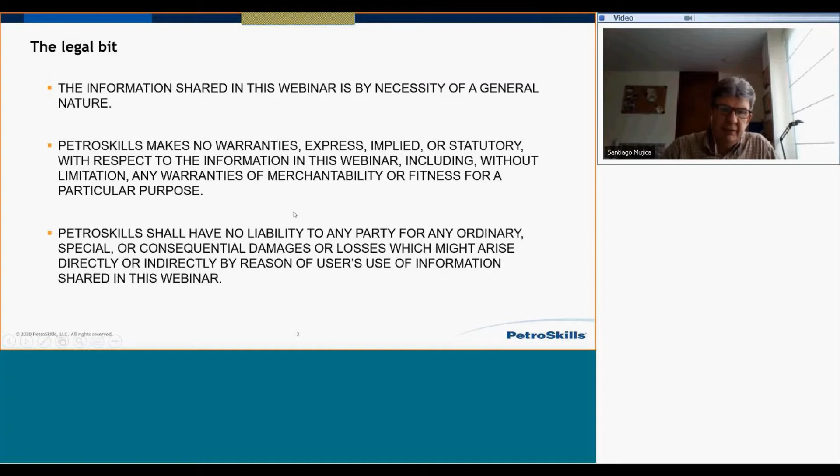Okay, the agenda. Let's talk about well integrity. We are going to talk about the industry documents that we have available to be in compliance with well integrity. Then we'll go to why the well integrity management process is required. That is the main subject here today. Then we'll talk about the possible causes of well integrity issues. We speak a little bit about well barriers, and then we go to some risks during well construction and the consequences.

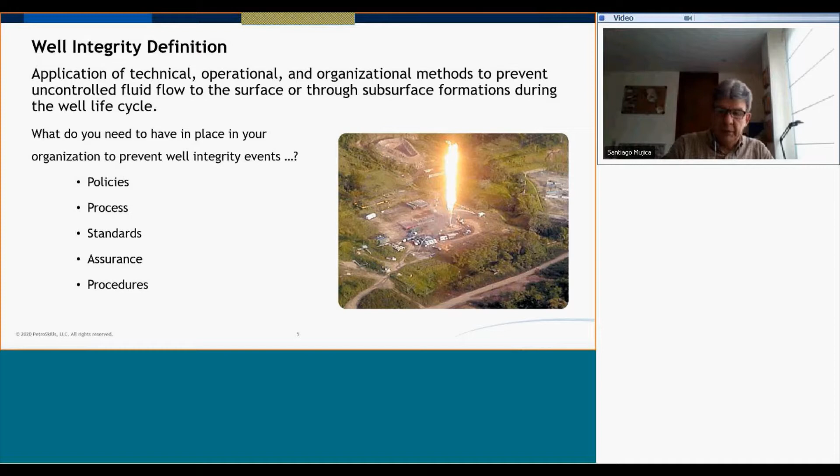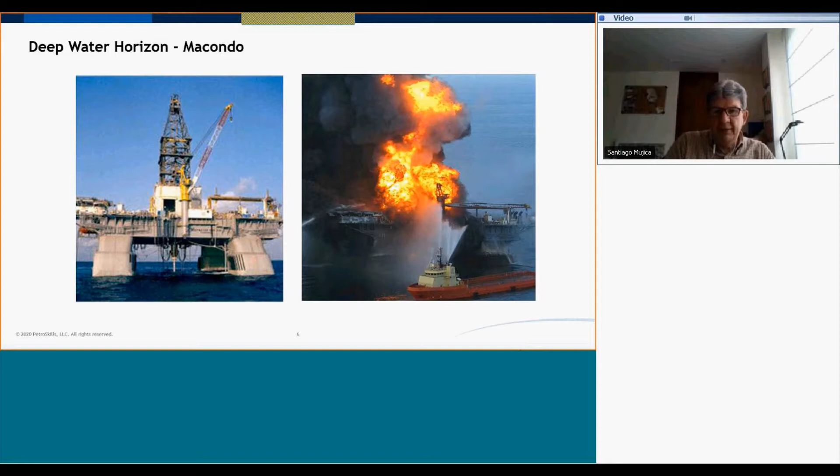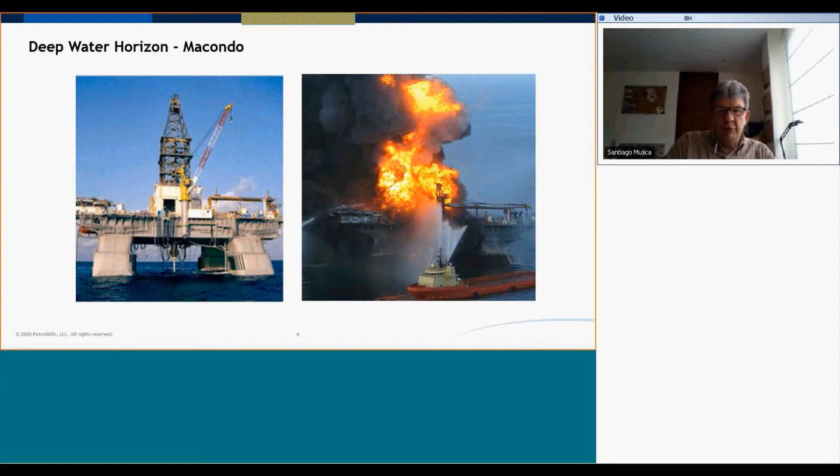This is Deepwater Macondo. This was the Deepwater Horizon, the rig in the Gulf of Mexico in 2010, the semi-sub rig that was used to drill the Macondo well. We had a well integrity issue in the completion phase at the end of construction. Because of that issue, we had an explosion. The well was out of control. Then we were trying to protect people. People were injured, people were killed, and then we had a big oil spill.

So this is the most drastic event that we have experienced in the industry, but we could have similar problems. So what I would like to introduce to you is how we can manage this, how we can prevent this.

So in the industry, we have many documents for compliance. The most important one that we normally have as an operator is the well integrity management system. That document is the one we use to prevent issues and to maintain the wells for the well life cycle. In that document, you need to include the organizational structure, risk, barrier criteria, barrier verification, management of change process, reports, standards, and continuous improvement process, and when you need to do audits of the system. So well integrity management is a key document that I recommend all companies have in place.

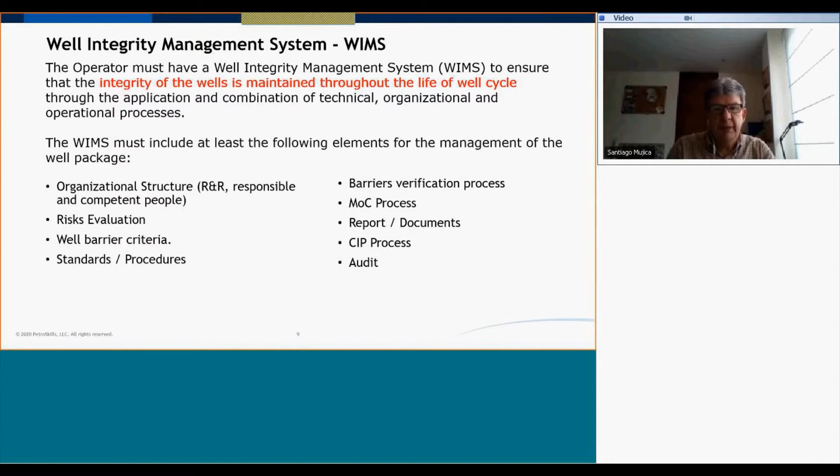Okay, the most important document as a company is to have a policy. The well integrity policy covers from the top down all the issues regarding HSE, operations, and the management of well integrity. Under this document you have the well integrity management system.

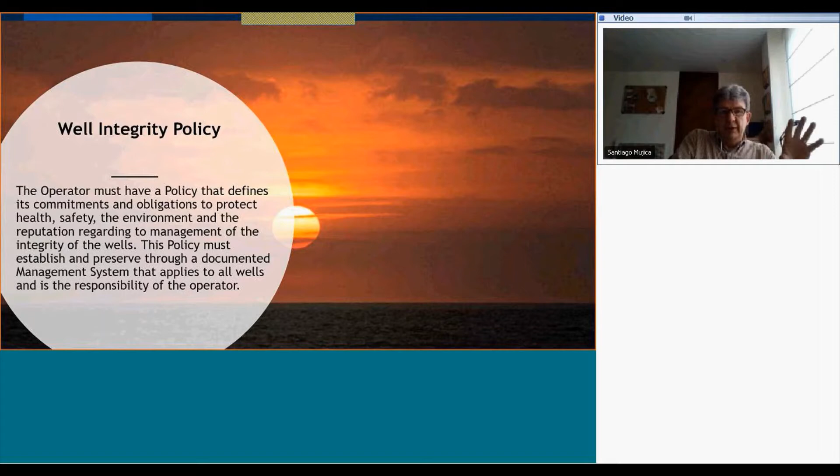Also, you have a lot of information from the industry that they have developed. We have a lot of normatives. One of the most important ones is the petroleum and natural gas industry ISO 16530, and NORSOK. And we have plenty of documents covering different things like annular pressure management, deepwater design, construction analysis, and downhole safety valves. So we have a lot of normative documents as a reference to prepare my well integrity policy and my well integrity management system, and also to keep that as part of the company policy. Okay.

Okay. Now, why is the well integrity management process required or important? So, based on the ISO 16530-1, these are the phases that they consider that we need as a company to have. So, from the basis of design phase, then the design phase, the construction phase, that is the drilling side, then we hand over this to operational people. We do some interventions and then have the P&A.

Okay, this process is very solid. I like this process because it includes all the areas that we need to have in well integrity, in the well life cycle. Also, we have here the lessons learned. So we always learn from the operations, learn from the intervention, and from the process itself, okay? So we need to feed back all these and learn and apply for the next well.

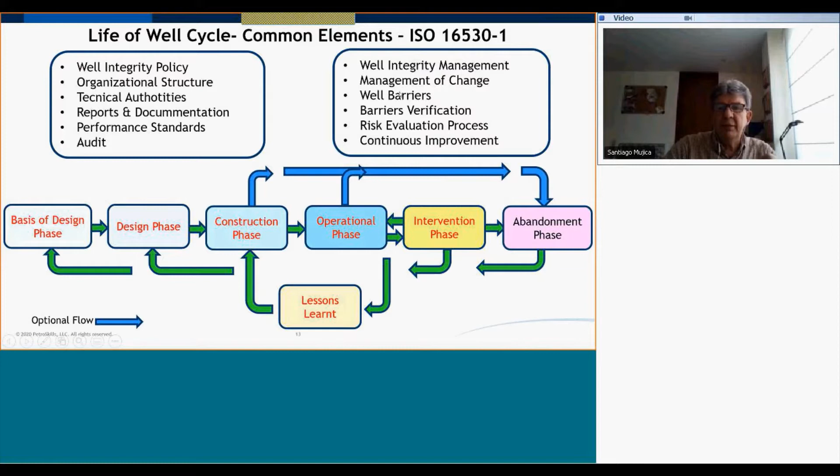I'm going to talk about basis from that process, from the ISO. I'm going to take the basis of design, but for the input requirements. So why? These basis of design documents, I consider this one of the most important documents because every time we develop a field, we need to have very clear what are the well objectives, what kind of data we need to have, what considerations we need to have through the well life cycle, okay?

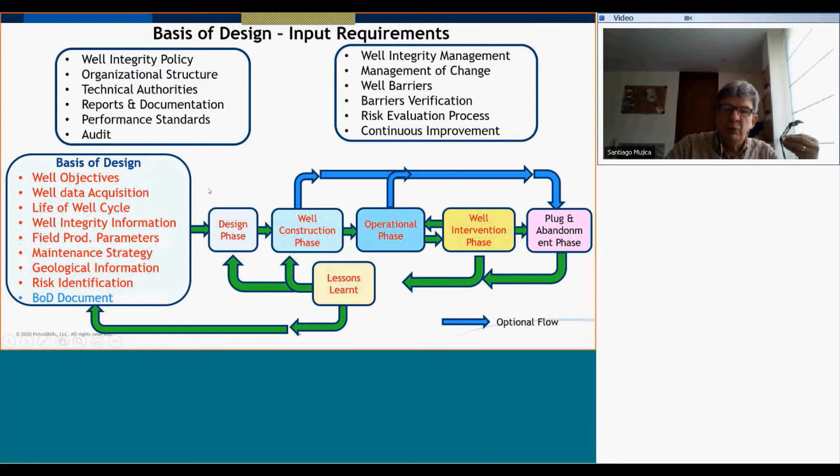What kind of fluid parameters do we need to consider? What kind of interventions are we going to do? What is the strategy for management, for maintenance, for testing the wells, for testing the Christmas trees, and so on? So this basis of design document is quite important to have. And we use that for every well design and so on, okay?

Based on that, how do I build the basis of design document and my integrity management system? So we need to start from scratch. Let's say we have a field, but we are going to do an exploration well. So from the exploration well, we obtain some data at the beginning, right? From the exploration wells and the appraisal wells, we have data.

We collect information from the fluid, from the rock, okay? And we analyze the productivity, the GOR, and things like that at that moment. We collect some information like PVT data. We simulate the well behaviors, the reservoir field behavior, and then the reservoir guys build the production forecast for that field, right? So from the PVT and some simulation studies, we can start building a field development plan where maybe we'll have some information from the water, maybe not. And at the beginning, we consider those kinds of factors, okay?

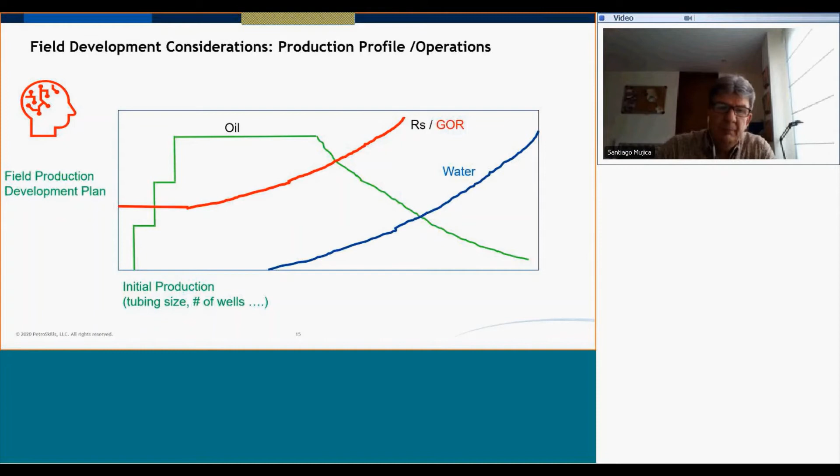From that, once we build that, we have the initial production, we define the tubing size, the number, we say we are going to drill, let's say 30 wells, 40 wells, and so on, okay? Does that field need artificial lift or not? What is the development plan to build and maintain the plateau?

Then we say, okay, we are going to perforate the zones, and we are going to do, let's say, coiled tubing interventions, or we are going to perforate the zones, the reservoir, by doing E-line, slickline, and maybe we can plan in advance from the beginning what kind of workovers we are going to need. So we need to plan that in advance just to see what size of tubing, what kind of damage to the tubing we'll have because of, let's say, coiled tubing runs, E-line runs, or whatever, okay?

Once we have the water composition also, if we are lucky, we get from the appraisal well the water characteristics, and the fluid characteristics we already have, we can simulate what kind of corrosion, erosion problems we will have, if we have sand production or not. So all those considerations are quite important for the completion, for the casing sizes and completion sizes. That's very important. At the end, once we plan the completion, we normally consider the most important part: how we are going to spend on P&A.

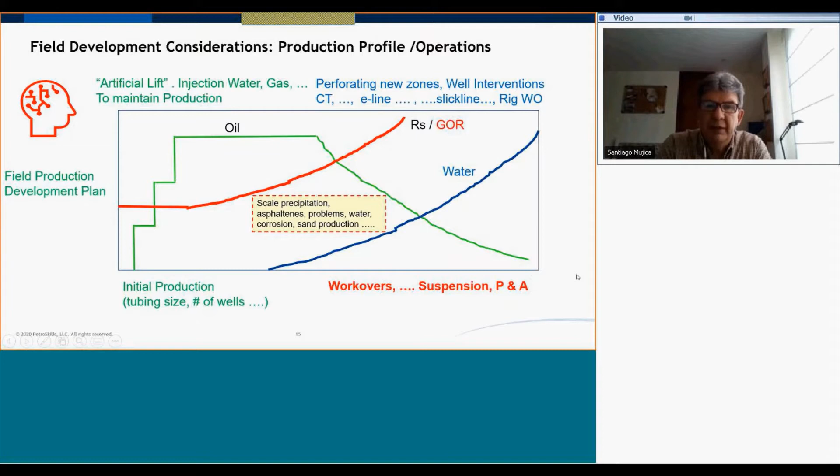So all that information from the beginning, that's what I talk about the BOD. BOD is accompanied by this kind of planning, and those are the things that we need to know. Okay, very important phase, this one.

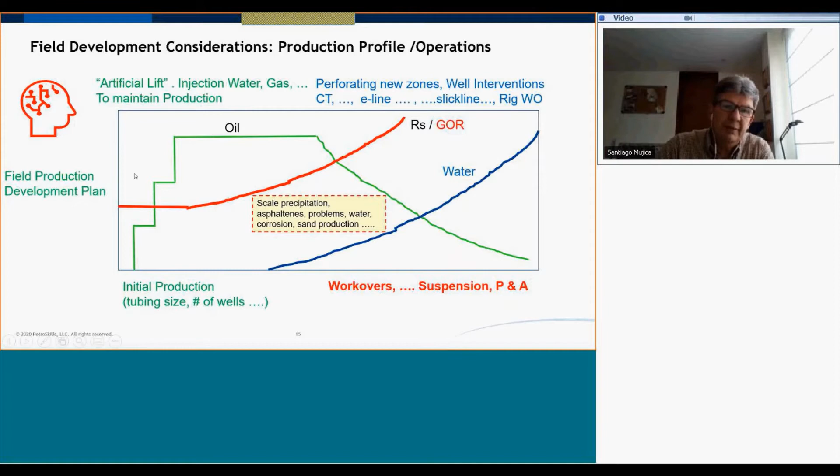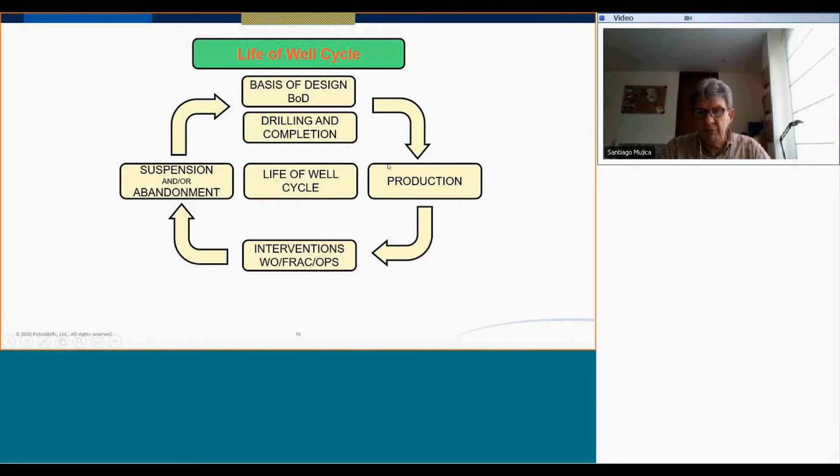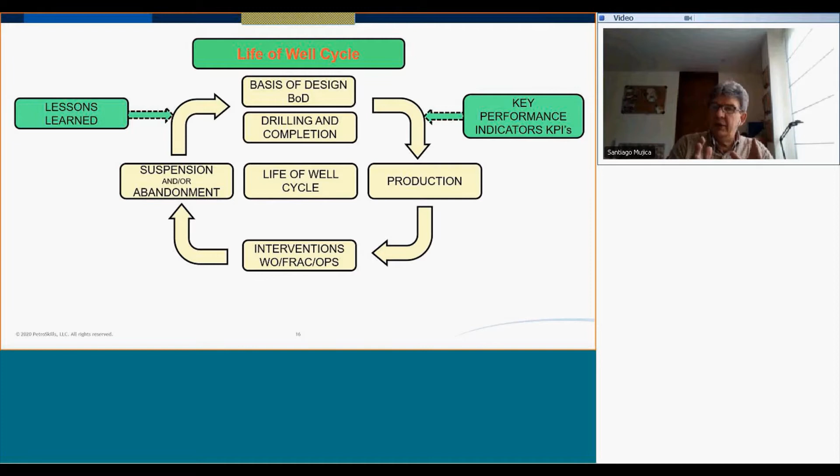Okay, this is the summary of the life of well cycle. The main point here is, once you define the basis of design, drilling and completion, production, intervention, suspension, we need to have, as I said, some lesson learned collection every time we drill a well, and some key performance indicators to know how we are doing.

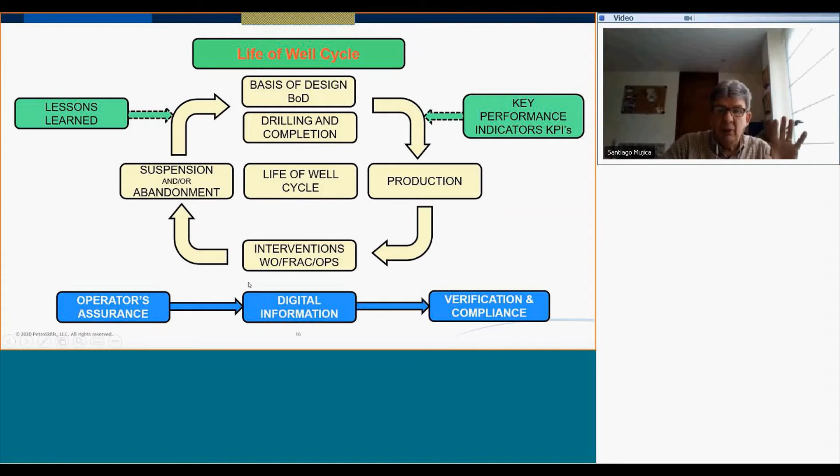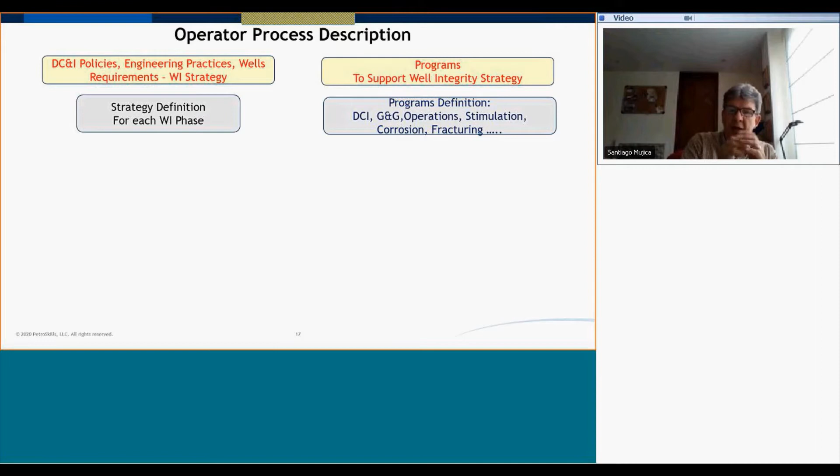So we need to consider that as part of a special program for stimulation or fracturing, what kind of corrosion we have or could have, okay? And we need to define a strategy for these kind of things for the different phases. So we have to work this from bottom to top. So once we have all the clarity on the programs, we can see how we are going to do the operations, okay?

Very important, as I mentioned, we always need risk in the drilling phase or completion phase or the intervention phase. So it's always important to have a risk matrix in which we define what kind of risk we will have. For example, in drilling, we have high deviation wells, horizontal wells, so we need to consider the risks. Because of that, we need to define exactly what problems we are going to have in the well, okay? All those things are supported by the methodology that normally you have.

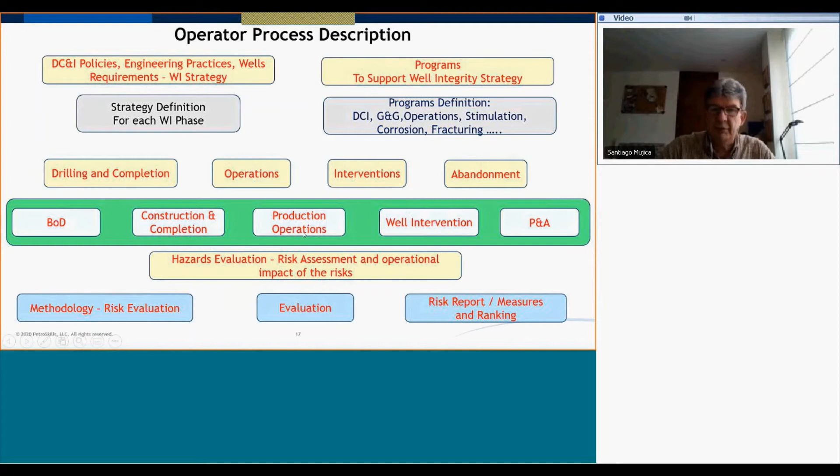Every company has a methodology for risk evaluation, and we will talk about that later. And then we need to keep a risk report and ranking of all the problems that we have. My recommendation for you guys, because normally a company has a drilling and completion department, then the operations or production people, interventions, and this is the phase that is normally included here. But I will always include this area that some people have to be focused on within the basis of design to update the conditions of the well, okay?

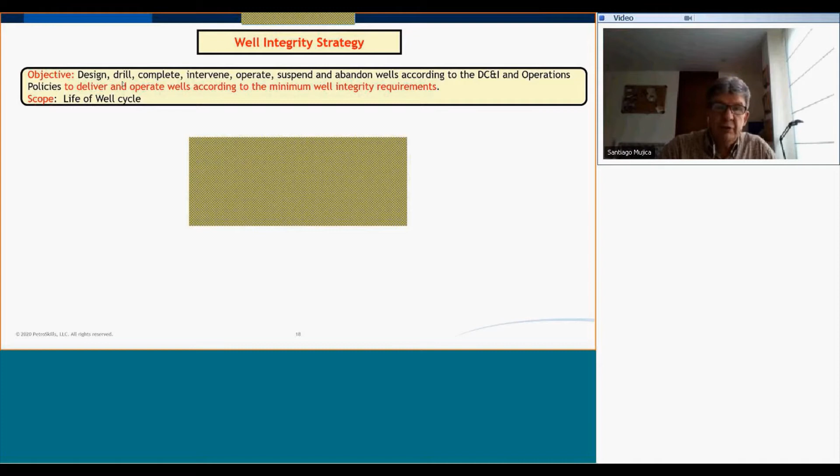As a company, you need to have a well integrity strategy. What is the integrity strategy? The integrity strategy is all those programs and procedures that we need to consider to deliver wells according to the minimum integrity requirements. Or in other words, we will always try to have the well with a very good integrity. Sometimes you could have some issues, but then we need to manage those, okay?

So now, I include field manager, but you can have here the drilling and completions manager. Depending on the company, you have some people that are responsible and accountable for this specific issue, well integrity. Then you need to define technical authorities in different areas. For example, a technical authority for casing design, a technical authority for completions, a technical authority for interventions. That's the ideal. Just to have people who really know and have experience in those areas, okay?

And that strategy should be supported by the minimum requirements, as I mentioned, lessons learned. You need to have a very strong management of change process, because sometimes we change process and we have problems. If we don't collect this properly and we don't evaluate properly when we are making changes in drilling a well, let's say, we could have some bigger problems than we have at that moment, okay?

I include here the well dispensation documents. I put it in red because normally those dispensations have been the most critical documents that you can prepare, because a dispensation is to postpone, let's say, some integrity fix. We are going to bypass some part of the facilities.

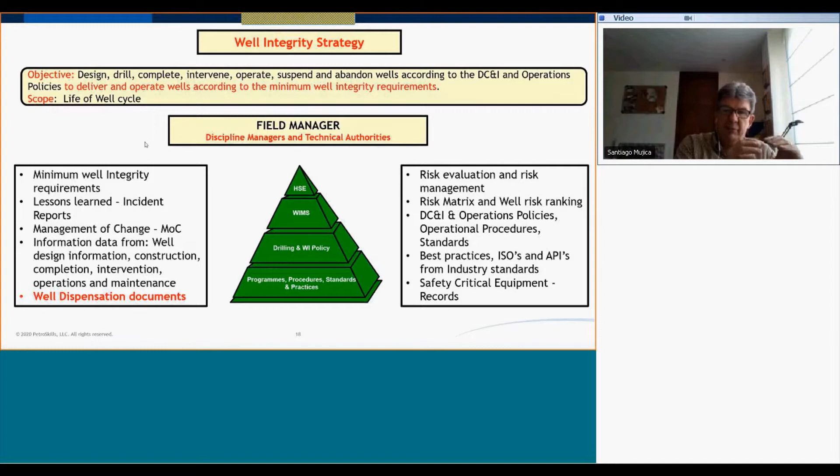Those documents are prepared specific for that field. If you have another field, you need to create new ones, because you can have some changes, okay? So you cannot standardize to different fields all the time. Or include criteria: for this field A, I have this procedure. For this field B, I have the other one, okay? So that's pretty important.

One of the things that normally we need to have is very good clarity on the roles and responsibilities. When we talk about technical authorities, also we talk about people. Always people are managing the wells. Always people are taking the decisions. So I put here some different activities and different positions. So let's talk about a few.

So the well integrity engineer is responsible for all the issues related to well integrity. In cementing design and operations, that person needs to have at least an intermediate level. In the evaluation of the multifinger caliper logs and USIT logs, she should be an expert. So we need to define what kind of expertise each person should have and what kind of responsibility. The well integrity engineer really needs to have integrated knowledge on many things.

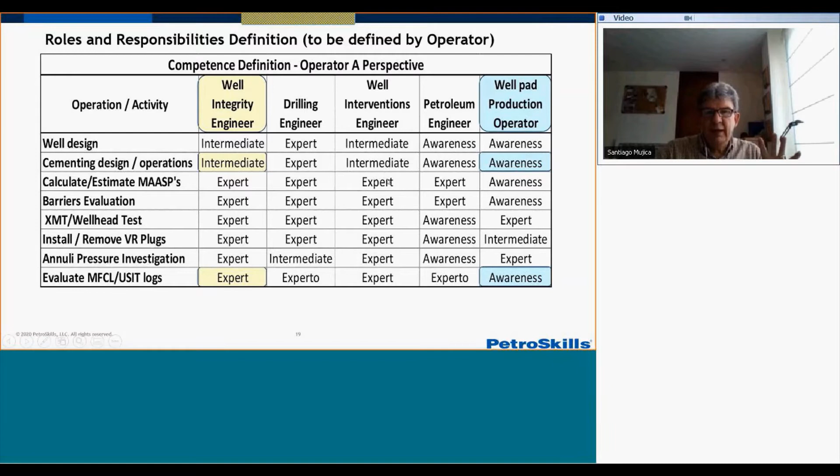But let's talk about a well pad supervisor, well pad production operator. That guy, in cementing operations, maybe just needs awareness about the quality of cement, the liner, the production casing. Okay, but in the annular pressure investigation, he should be an expert, right? And in the well test, Christmas tree and downhole safety valve test, he has to be an expert. So depending on the position, we need to specify what kind of responsibility and role each position should have, okay?

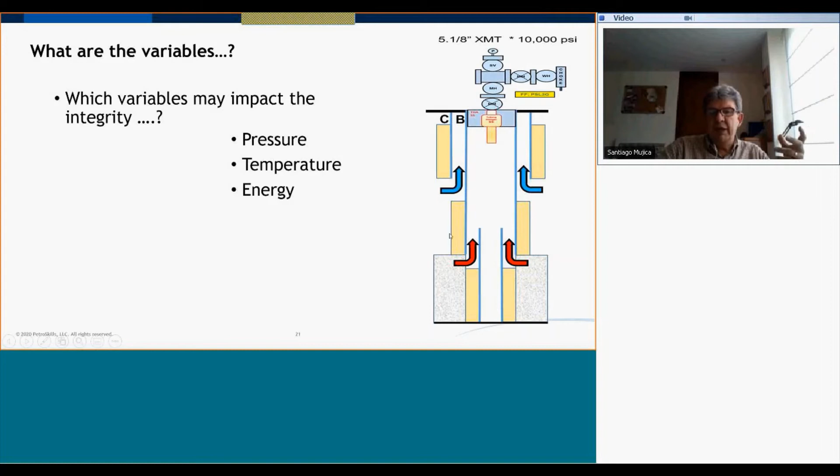Now, let's change the subject a little bit. What are the possible causes of well integrity issues? What are the variables? I have a very simple well here, not with completion equipment yet. We have pressure, temperature, and energy. We always talk about annular pressures. We have temperature profiles. We have annular pressure changes because of temperature changes, okay? And energy, there could be some formations that are overpressured. So we have all those factors.

Normally we talk about these factors, but there are other very important variables in well integrity: people who make the decisions. The decisions are made by us, by people. For example, in a well intervention, the well intervention engineer made the decision. You can have a very good procedure, but who is making the decisions at the rig site? Who pressure tests the equipment? Us.

So who made the decision about the leak, if the pressure test is fine or not? So, people: that's why we talk about roles and responsibilities and competencies. We need people with competence to make decisions on well integrity, okay?

Equipment. When we talk about the equipment, we select equipment based on corrosion, erosion, the pressures that we are going to apply, and the connections and things like that. So we decide what kind of equipment we are going to run. It's not only the pressure and the temperature, sometimes it's the equipment. If the equipment is not designed properly, we make mistakes in the well. We'll see that when we see the problems.

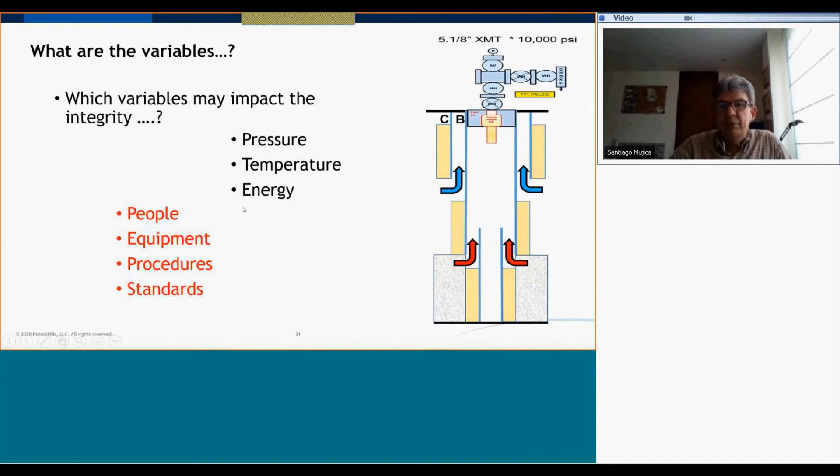Procedures. As I mentioned, if we are doing a cementing operation and I don't follow the procedures, maybe the cementing operation is not good. So how do we ensure we are following the procedures and standards? We can have standardized procedures, standards for our operations. All these are things we need to keep. It's not only related to pressure, temperature, and energy. It's related to people and other stuff.

Okay. We mentioned safety critical equipment. One of the most important things in wells is the critical equipment that we install. We have a wellhead, the casings, production casing, production liner, packers, tubing, downhole safety valve, Christmas trees, and maybe other tools. But what is safety critical equipment? Let's take an example: the production packer.

It is equipment that we need to ensure has all the capability to support the burst pressures and the collapse pressures. The rubber element must be designed for the fluids we are going to work with, or the stimulation fluids we are going to pump into the well. Also the temperatures at which we set that packer, and the stresses and loads we are going to apply onto this production packer.

So there are many factors to consider in the selection of the packer, and that's why we call it safety critical equipment: if the packer fails, we are going to have leaks in the well from the internal to the annulus, and maybe from the annulus to the B. So that's what we define as critical equipment, okay?

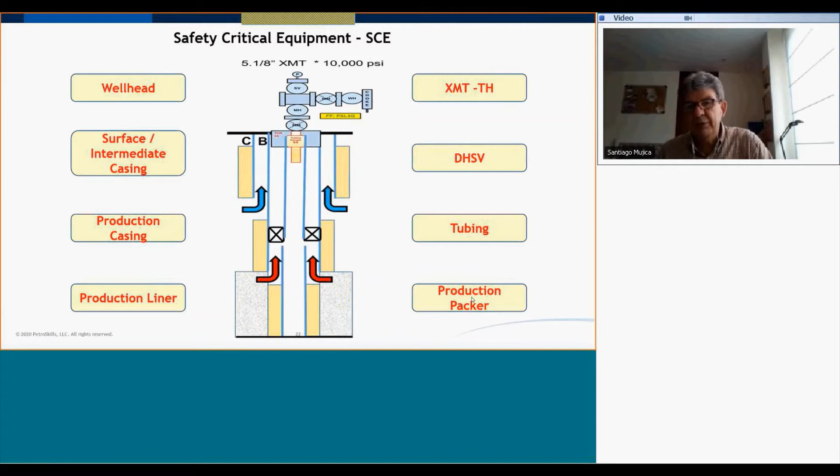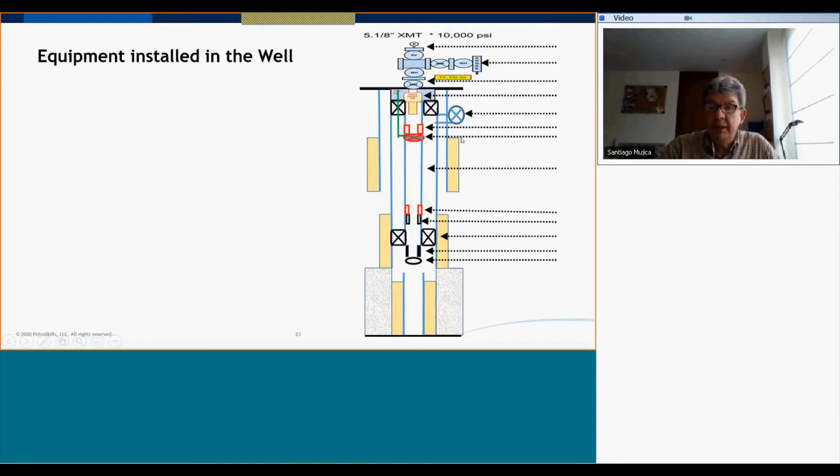Safety critical equipment. Let's say we have this kind of equipment in a well. We have many pieces of equipment in the well, right? The first question, as a completion engineer or operations engineer, is to identify what kind of equipment I'm using, okay? Do we really need that equipment? What is the piece of equipment for?

Let's say this is a sliding sleeve. Do we really need that sliding sleeve? Are we going to operate it? How many times are we going to operate it? When are we going to do it? Sometimes we include tools or pieces of equipment that we don't need. So the less equipment you run, the fewer problems you are going to have in the well, okay?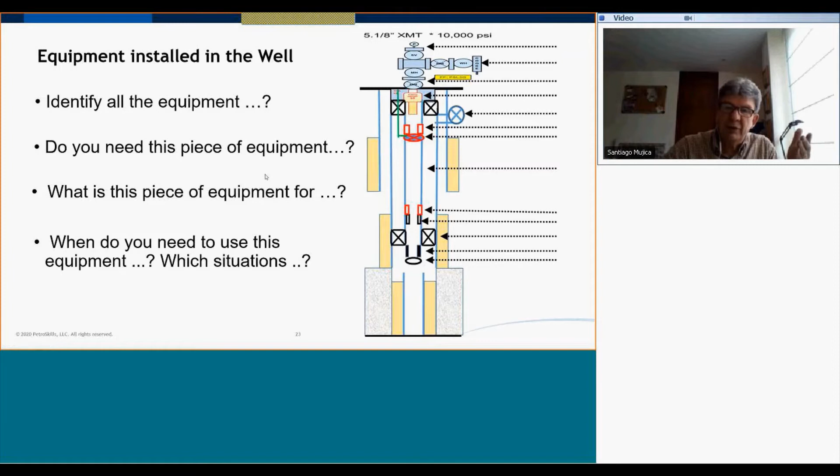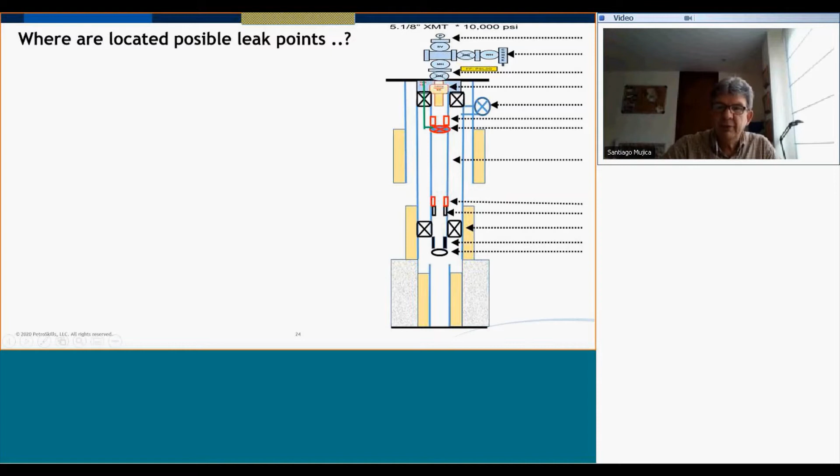Where are the leaks? For the same well, where are the leak points here? All these leak points, right? So look at the points where you can have a leak. Let's say you have a well at 10,000 feet, and each casing joint is 40 feet long. So how many joints do you have? 250. So at every connection we have a possibility of a leak, right?

So we need to ensure the design of the connections of that casing, whether the casing supports the loads, whether this casing is designed for gas or not. Is it a premium connection or not? Do we need a premium connection? How are we going to cement it? What are the possibilities of having a failure in the cement?

Talking about the tubing, did we really design the tubing for the loads we are going to have? Maybe yes, maybe not. So we need to design and simulate that tubing. Do we apply the proper dope on it? I mentioned the circulating sleeve. Is that circulating sleeve the right material?

When we talk about tubing and casing, do you have CO2 or H2S? Do we really have the proper metallurgy for this tubing? If not, we are going to have corrosion. Then very soon, if you have water, you are going to have leaks through the tubing or the casing.

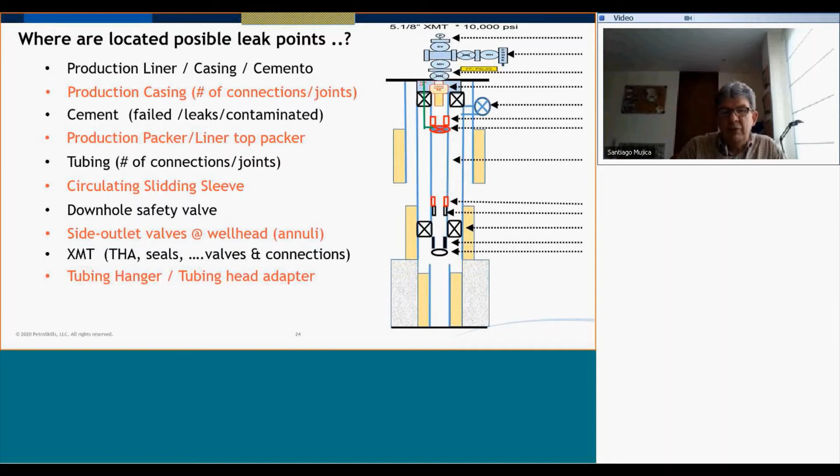The Christmas tree. What about the tubing head adapter? Is the tubing head adapter designed for corrosion? How is the primary seal? Is it metal to metal or is it an elastomer? Do we really need a primary and secondary seal? All those kinds of considerations we need to have in mind always when we are designing wells, okay?

Let's talk about barriers. People talk about barriers. So we have different types of barriers: mechanical barriers, operational barriers, human barriers, administrative barriers. Okay, what is the meaning of barrier? It's a combination of components or practices that contribute to the reliability of the system to prevent and keep control of undesirable fluids to surface or downhole.

So a barrier is something that we run into the well to prevent flow or to maintain the pressure that it is designed for. We have mechanical barriers like plugs, liner top packers or production packers, and we have operational barriers, where there are procedures in place. There are human barriers, because sometimes, as mentioned before, a person will say, no, this is fine, and it's a human barrier. Or you say, no, we have to pressure test properly.

We have administrative barriers. Sometimes what we say to management, they are going to make a decision, so there are administrative barriers in the decision. Sometimes you say, as an engineer, we need two barriers, and some people say, no, one is enough. Let's pressure test to the maximum pressure. No, let's pressure test to 2,000 PSI. So those are human barriers, administrative barriers. So be careful with that. As an engineer, you always have to make calculations.

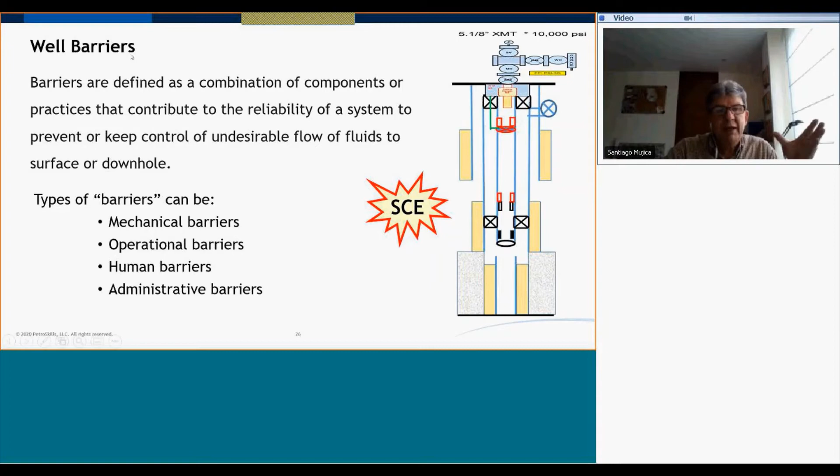On the number of barriers, we always recommend a primary and secondary barrier. Normally you design for a primary, a typical barrier that maintains the source of the pressure. Sometimes the secondary barrier has the same qualification or composition, because if the primary barrier fails, that pressure is going to be applied to the secondary. So depending on your criteria and the needs of the well, the pressures and the fluids, the type of barrier for the primary could be the same as the secondary or very similar, okay?

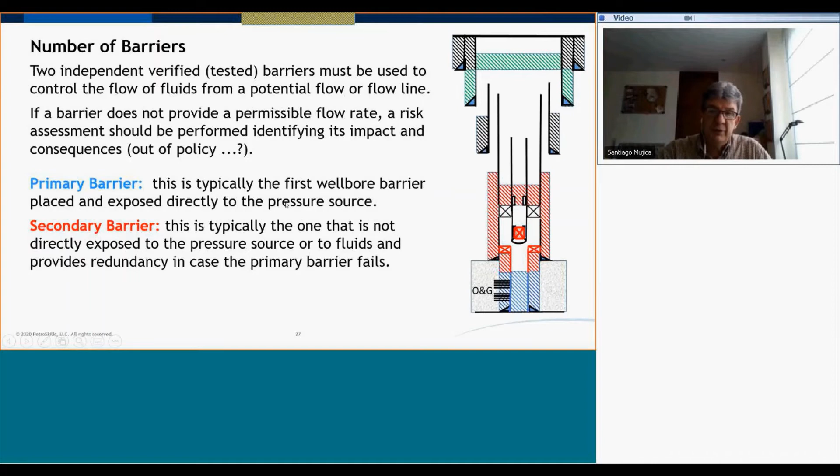So that's a criteria. In this example, the blue one is the primary. This is a P&A, so we pump cement, we isolate all the perforations, we cover above the perforations, and we have very good cement behind this. We also have the secondary barrier: a liner top packer here, a casing, and we set a second plug. So we have primary and secondary barriers to prevent any fluids in the future. When you P&A, you need to ensure you have proper isolation, okay?

Now, how should those barriers be verified? Normally we do functional tests. Those functional tests are done externally, before you run into the well. Let's say a packer has been tested in the shop. Once you pressure test it and verify the packer or the plug is fine, then you do a pressure test verification at the well itself.

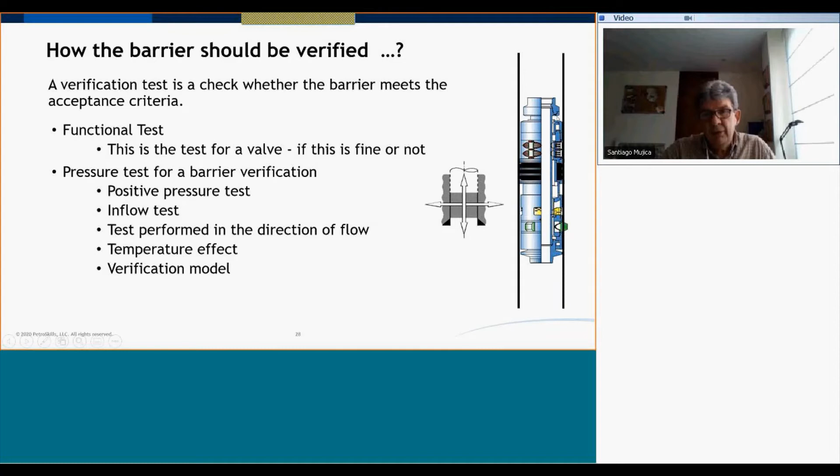Normally the recommendation is to pressure test in both directions. So you can do a positive test and sometimes a drawdown test if possible, okay? And you need to consider all the temperature effects and conditions. But remember, a barrier that you run in the well is safety critical equipment, because if it is for permanent isolation, you need to verify that it is going to work for a long period of time, okay?

And these are the performance criteria for different barriers. So every time, as I mentioned, you have, let's say, a packer or plugs. So you need to know how that packer is going to behave with time through running many times with the wireline operations, or what kind of specification for burst and collapse.

Then you need to perform a connection test, material test, functional test, test duration. All those things depend on the criticality of the equipment in the well, okay? But always you need to have minimum considerations to control that, okay?

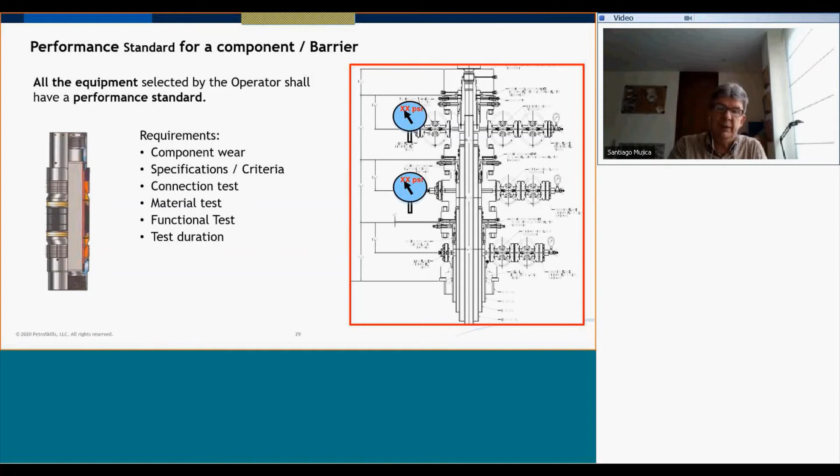A little bit about tubing retrievable safety valves and wireline retrievable safety valves. So depending on the requirements and the well type, you can have wireline retrievable or tubing retrievable. This depends on many variables. For example, every time I run a wireline retrievable safety valve, I need to pull it out, do the operations, and then run back the valve. But every time that this profile or the seals are exposed to operations, you have the risk of damaging those seals.

So that criteria always depends on the operational side, because if you have so many wireline, E-line, coiled tubing operations, there is a high risk of damaging that profile. And the other thing that may push you to make that decision is the size of the production casing. If you don't have enough space to run a tubing retrievable, then you have to run the wireline retrievable, okay?

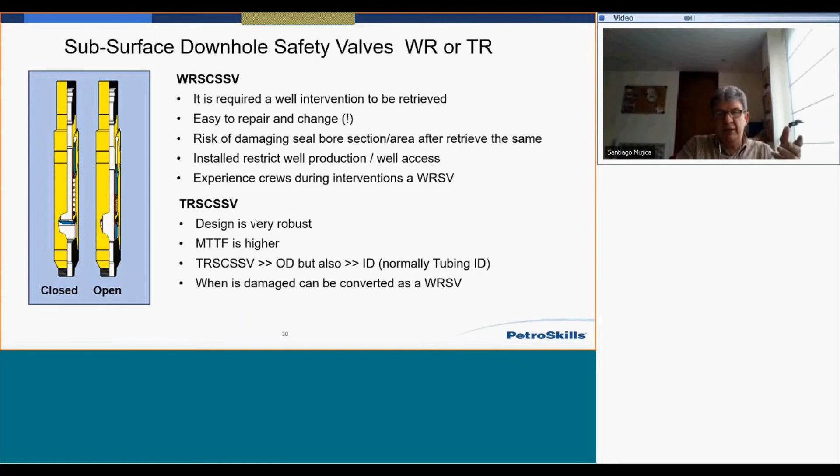But I recommend always the tubing retrievable, because then you have the option. If you damage that valve, you can do troubleshooting and run a wireline retrievable safety valve afterwards, after the damage, okay? These are the API rules, everybody knows them. Everywhere, there is a recommendation to pressure test the downhole safety valve at least twice a year, or every 6 months, okay?

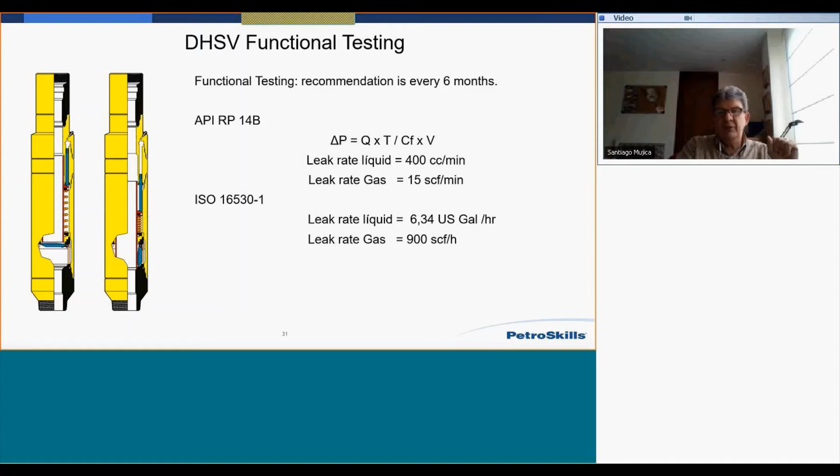Let's talk a little bit about risk. We talked about processes, about some barriers and issues. Now let's talk about some risks during construction. What is one of the most critical barriers in the well? Our cement. Cementing operations are the most important things to have a proper isolation, to prevent leakages, isolate production zones, or abnormal pressures, okay?

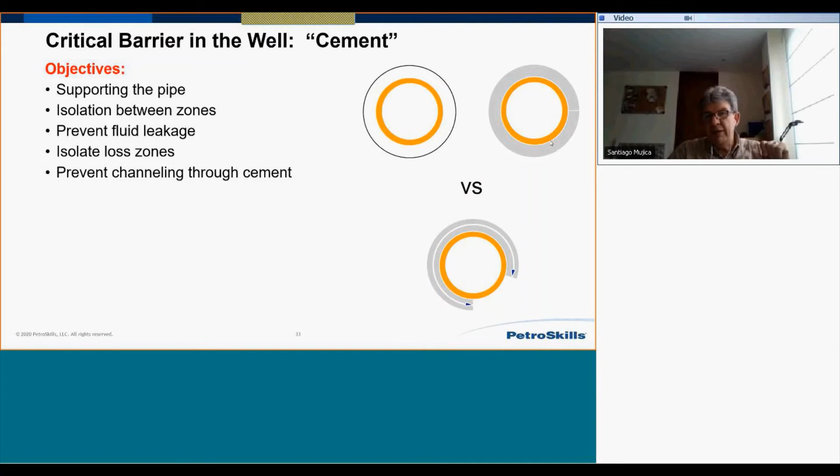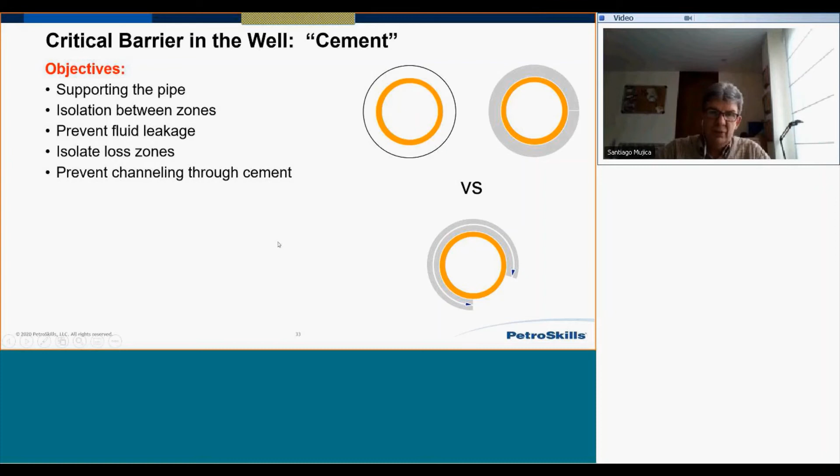So this is a nice cement operation where you have 100% cement. And I have an example of no cement, or maybe partial cement. For me, this is the same. You don't have cement, you don't have isolation. If you don't have good centralization and a good 360-degree isolation in the casing or the liner, you don't have good cement anyway. Some people say this is more or less okay. No. Either you have isolation or you don't.

So this is quite important. 70% of the problems that you have in the wells is because you failed to do something on this. In other words, the planning phase is the key factor to be successful in cementing operations. In the other training course that I have, I speak a lot about job planning, spacer design, and slurry design. But you see, minimum 60 to 70% of this is the planning. The planning phase is the key.

What kind of cement do you have here? As an example, in the previous slide, we have a partial cement. This is the bond index, so you have communication between zones, so you don't have a good cement job. Maybe this is a contaminated cement, and it's on one side of the casing. Also, you didn't centralize properly, and you have this varying through the 360 degrees.

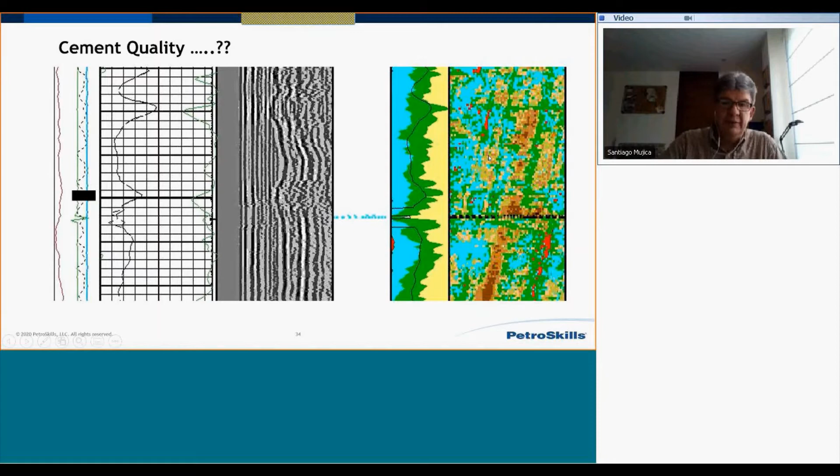What are the problems when you have these kinds of issues? What happened? Maybe you have loss of circulation, maybe you have premature returns, maybe you have problems with the spacers.

So at the end, based on different problems, because of planning, because of pumping rates or whatever, you have water zones producing, contaminating the oil zones, so you lose the production of the well. And remember, the water comes pretty easy, so the oil production will be highly deteriorated because of problems with cement. So the cement operation is a critical factor for success in the well, especially, I would say, in production liners and production casings, okay?

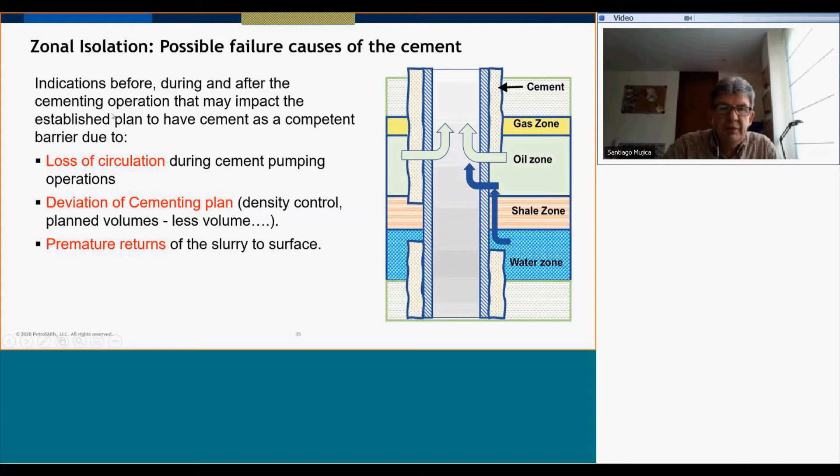And there are so many more factors that we induce when we are doing the cementing operation. Later on, when you have these issues with lack of isolation or zonal isolation problems, then you have pressure in the annulus. Then we need to start talking to the well integrity engineer and production guys and say, okay, guys, we have a problem. We have 1,000 psi in the annulus. So then we have to set an upper limit. We need to know exactly what kind of pressure we are going to need to manage this, not to have problems downhole. Maybe we'll have pressures higher than the equipment that we have installed in the well.

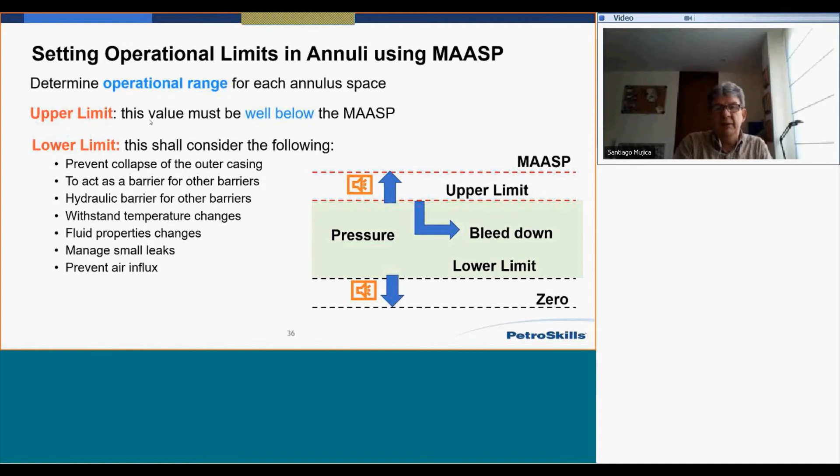So you need to start concentrating on managing the problems in the annulus. Normally the maximum allowable annular surface pressure is 80%, as a rule of thumb, 80% of the max, okay? This is not ideal, but we have many wells. That's real life. Sometimes it's very difficult to manage, so we need to survive with that, but we need to know exactly what we have at surface and what we have downhole to prevent problems in the well, okay? These conditions basically are in the wells.

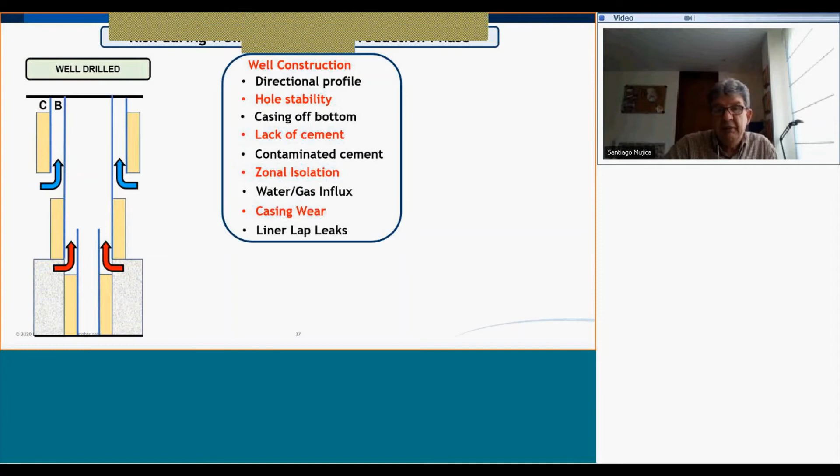Let's say when you are drilling a well, we have other problems. Why do we have those problems in cementing operations? Sometimes we change the directional profile, and now the directional profile does not allow you to have a good cementing operation. Maybe you have an unstable formation, and you have hole stability problems. Then you cannot get the casing to the bottom, so you lack cement, or you pump the cement operation and you have contaminated cement. As a consequence, we don't have zonal isolation. Maybe you have water influx or gas influx, the worst case scenario.

We have some wells in BP Colombia where we have a zone with water influx, but it's still a problem because they sometimes get too high pressures. But when we have gas in the annulus, that's a different problem. If the gas is only gas, fine, but if you have H2S, let's say in the Middle East, and you have a lot of H2S, it's complicated.

Another issue that is very common is casing wear. We design wells for certain pressures in the casing design. But let's say this production casing is 9 5/8 inch casing, and then while we are drilling the lower section, we spend so many hours rotating. If we don't have drill pipe protectors, then we'll damage the casing and generate casing wear. If this casing wear is high, then you could have big problems in this production casing during production, okay? So casing wear is a key factor in integrity.

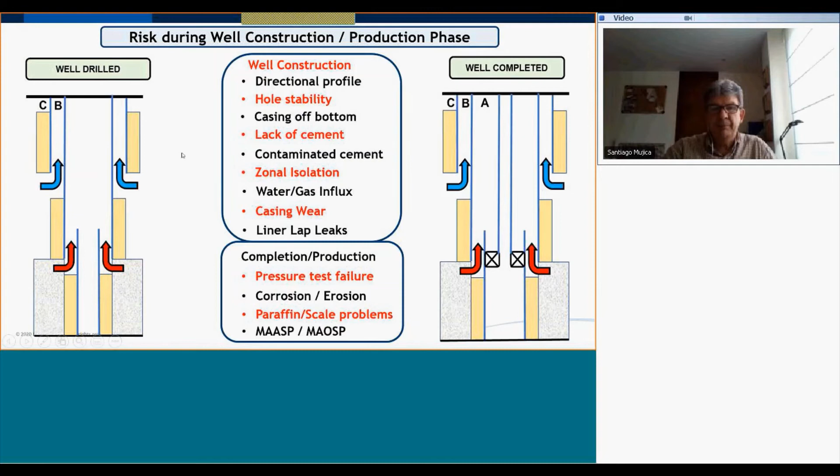Another problem that we normally have is corrosion and erosion. Depending on the fluid, we need to design the completion tubing considering those issues. Do you have paraffin or scale problems or whatever? At the end, we talk about the maximum pressures in the annulus. So there are so many different issues here. I like this diagram because this is something that I saw during my work experience when we were drilling a well.

There was a field around this well. There was a gas injector well close by, and also oil producers. And when we were drilling the well, we had a kick. We had to shut the well in, do the well control process, and unfortunately, we believed that we shouldn't have this problem, but that problem came from another well that had some integrity issues, no cement, and the gas injection was moving downhole, and we had to abandon this well. Why? Because we had an integrity problem in other wells.

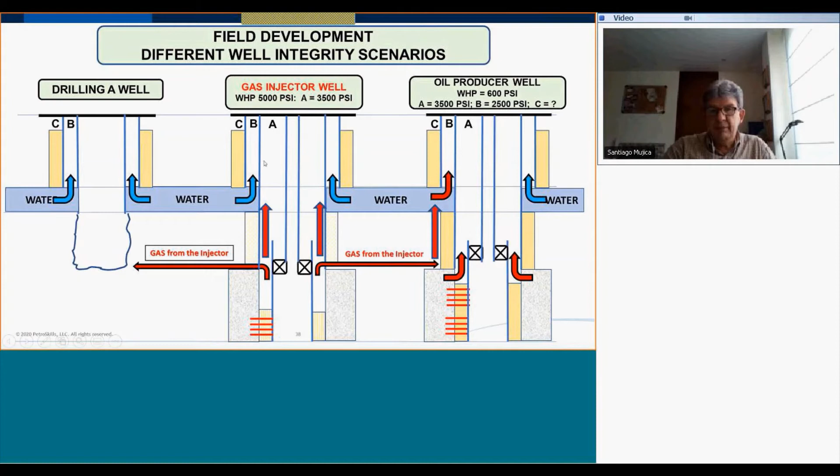Okay, you have to be very careful with that. Also, you can have this communication through the other sections, in upper sections. You see? So this is quite a good example, and it's real. It is happening. It happened to me.

Okay, then we talk about, in most of the fields, sustained casing pressure. And we say cement quality, casing liner leaking. We say no, this is completion equipment leaking, tubing leaking, sliding sleeve failures, other causes. Okay, and how do we control, how do we manage those?

Pressure management. Most of the time, we have to manage the pressure at surface. We fix leaks. Sometimes we have the ability to fix leaks, let's say in the tubing, because of a connection leak. We bleed pressure, so we can install, with special procedures, pressure management procedures, and manage bleed-off pressure; automatic bleed-off pressure sources could be an option. Sometimes we need to perform a workover. In the worst case scenario, it's a P&A.

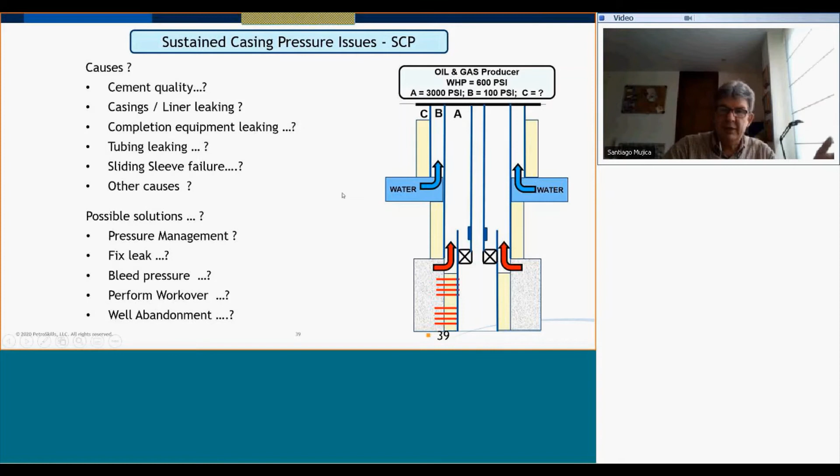So we need to look to prevent these problems, okay? Working on these issues, going back to the design and so on, okay? Something that happened, I have seen this problem at least 3 times. A well is shut in for a period of time. The well cooled down, everything is cool. Then the operator comes to the well. They say, okay, we need those 50 barrels that we have in well number 100. So the operator goes to the well. The well has A, B, and C annulus pressure.

He opens the well and what happened? Temperature increases as you put it on production. When you put it on production, the annulus starts heating up. The fluids expand. When the fluids expand, the pressure increases, and the pressure blew out the surface wellhead. Why? Because liquids have a much higher expansion with temperature than gas. The gas compresses, so you don't have that sudden effect. You will have it, but not as with liquids. So when the well was cold, that happened. Okay, so be careful with annular pressure management. This is a very dangerous issue, and we had 3 problems on that.

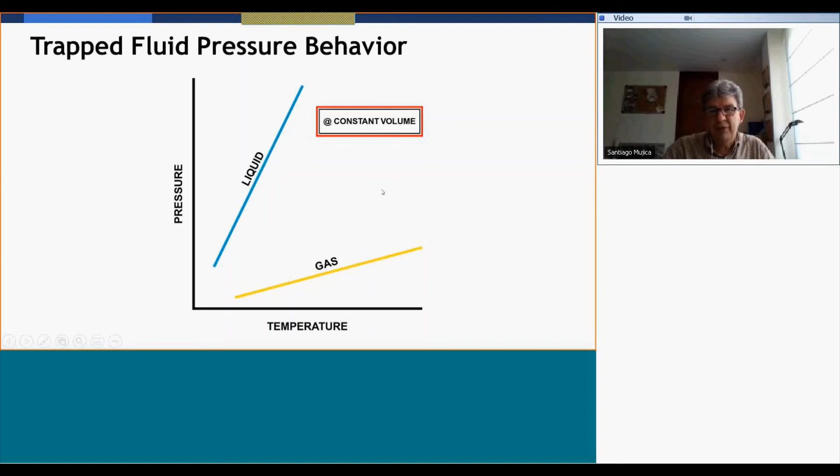Okay, let's talk about risks. The information required for evaluating risks is monitoring the wells. You need to monitor the wells. You need to know what is the critical equipment. You need the functionality test for that. You do a risk evaluation per well. Then you do a ranking and mitigation plan. How do you manage that? The company has a risk matrix, right?

You have the well risk ranking, and you have well by well analysis and see what kind of causes, if you can identify that, if this is producing or not, shut in at the moment, if this is a production well. So then you have different actions. Rig workover, this is a high risk well. Then you say, it's high risk, but I will try to do a tubing patch. Then another well that is a rig workover. In another well the downhole safety valve fails, maybe we can run an insert valve. Okay, and also do troubleshooting.

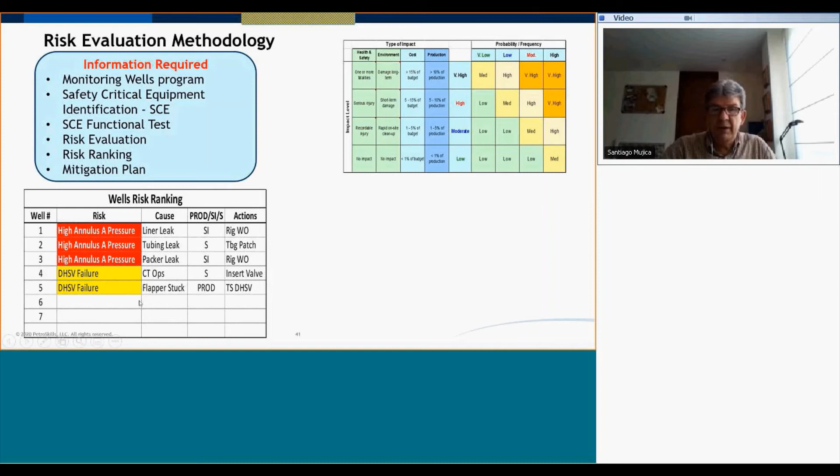So you need to identify the risk condition and see what you can do. Then when you do this, you move down the risk. So then you know exactly what you have in your well stock in your field, okay? This is a process that you need to follow in any field nowadays. Also, this is an example, you can manage different risks and manageability of the problem. So you can have areas or wells. For example, you can say well intervention for us is difficult or is not difficult.

The storm chokes, maybe you have storm chokes, you have, let's say, carbon steel, wells completed on carbon steel, and those are very high risk when you have CO2. I work in a field like that.

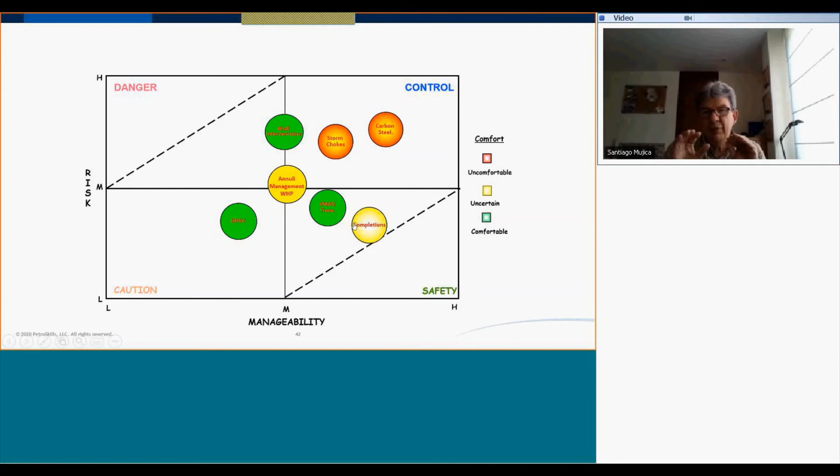Or annular management, you can move this in a different position depending on how you manage the annulus pressures. What are the conditions of the trees, the downhole safety valves, and the completions. So the well integrity normally works with the different departments. You can identify what kind of risk in general, and also you have the matrix, okay?

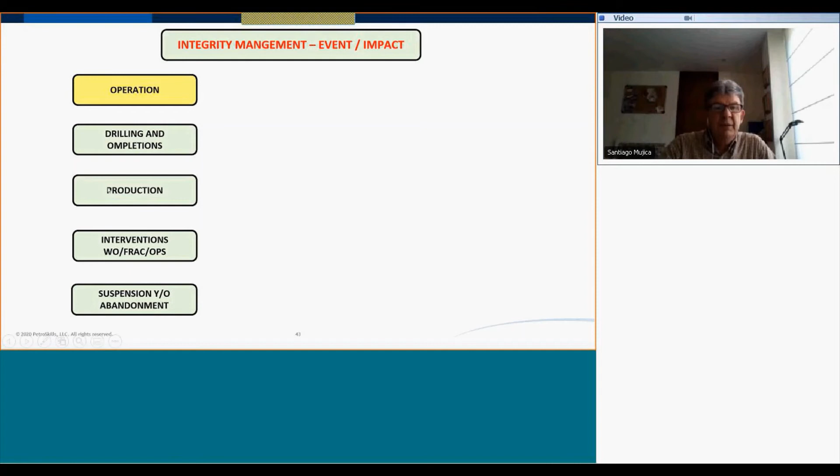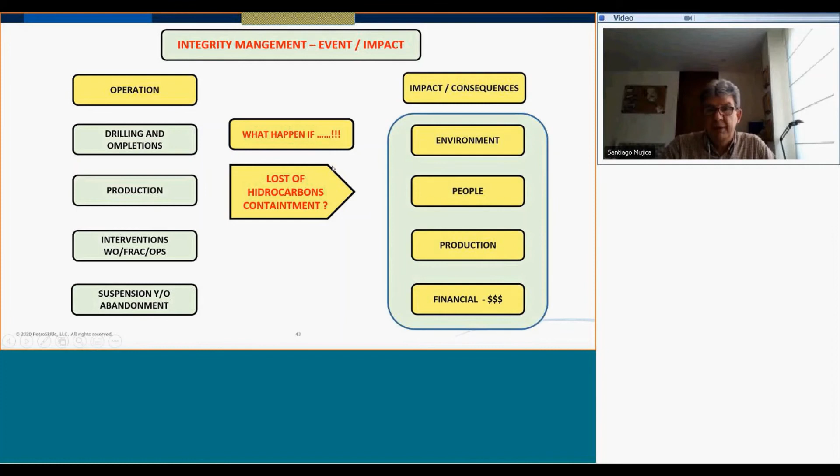So what are the different operations we have? We have drilling and completion, production operations, intervention, suspension, and on. Through those operations, what happens if you have loss of hydrocarbon containment? You will have impact to environment, people, production, and financial.

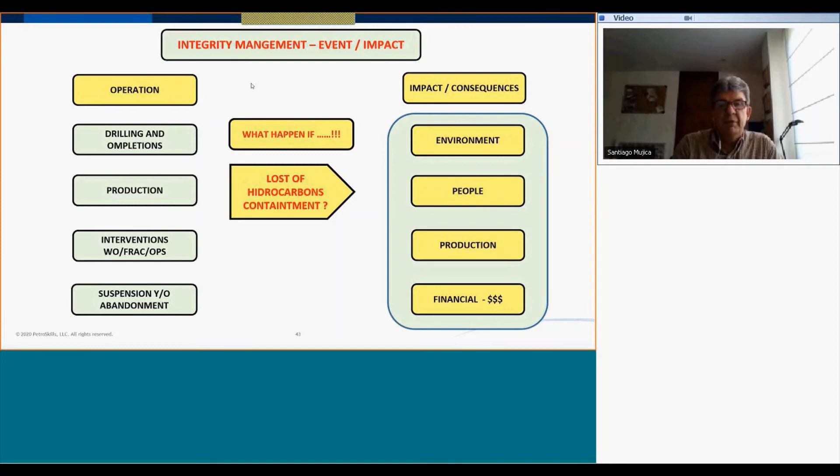Be careful with that. So all those, let's say, designs, procedures, standards, and things that we are talking about today on the process are the things that we need to work on as a company to prevent problems, okay? So that's the target, okay?

Bueno, that's the presentation that I have for today, but I would like to mention that we have other seminars. This seminar was an hour. We have also some seminars focused on drilling and completions, well interventions, or production operations. All those seminars will have the duration depending on the time and the availability from your company.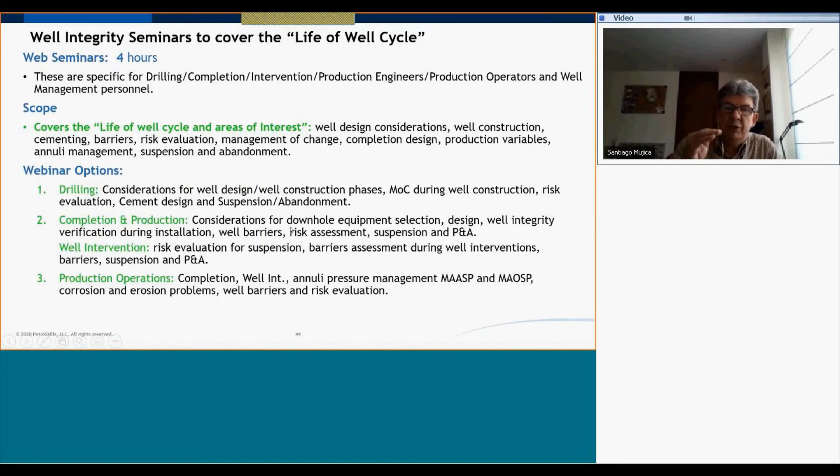We can have from 4 hours to 8 hours each, where I speak in more detail about considerations for designing the casing, the tubing, the cementing operation, the wells. So I have a clear agenda for each specific subject, okay? So I am open to questions if there are any questions today.

Yes, thank you, Santiago. The first question we have is, what's the difference between well integrity and wellbore stability? Okay, when we mention wellbore stability, it's all the problems you have when you are drilling the well. You are drilling the well and you have an unstable formation, and the formation comes into the well and you start having problems drilling or cleaning the well up. That's an issue from drilling.

And well integrity is all those problems that you have as a consequence of different problems and issues during the construction or after the construction of the well or during the intervention. So well integrity is related to the whole well, and unstable formation is a different issue, okay? It's related to drilling, yeah.

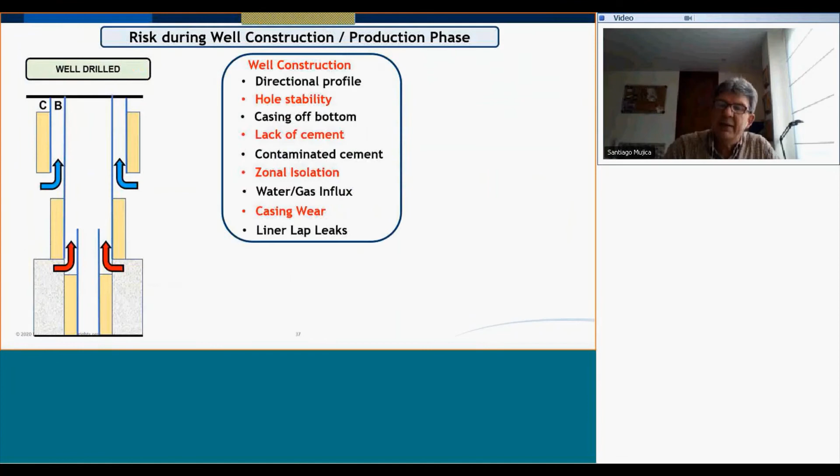Okay. The next question is, who's responsible for preparing the WID? The well integrity management system? It said WID. I'm not sure. Well integrity document. I imagine, if this is right, it's the well integrity document. Normally, it's prepared by the well integrity engineer, but that document should be compiled and worked with the different teams, okay?

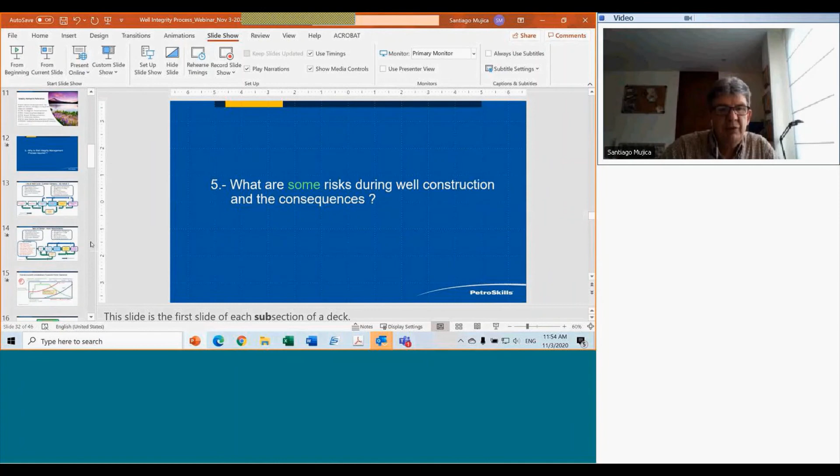My recommendation is, because the strategy is between all the departments, there are different programs. The integrity guy is responsible for collecting all those programs into one and including that in the well integrity management system, okay? So it's quite important. This is a very good question. It needs to be worked out with all the departments, but it has to be focalized in the well integrity team leader or management, okay?

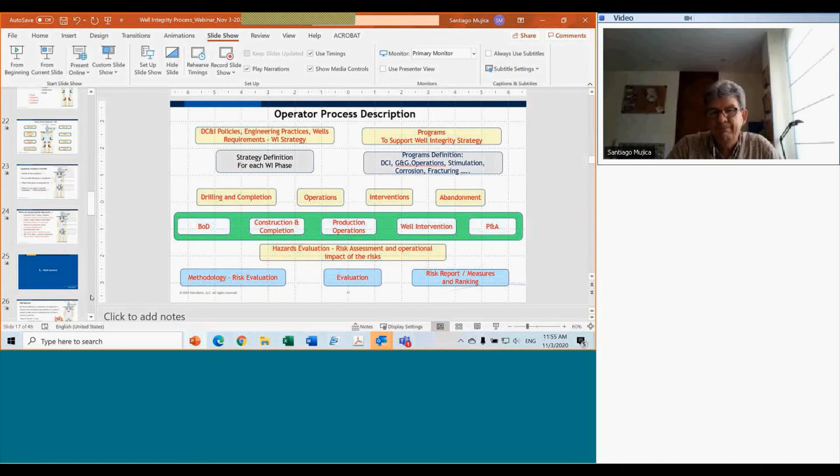Okay. The next question: planning is a problem, but what exactly in the planning is the problem? Also, isn't slurry design, spacer design, layout part of the planning? Yeah, talking about cement. When I talk about job planning, I'm going to give an example. When you drill the section, before you finish the section, you have the information related to the formation properties. You collect the water, right? You run the simulations in the lab with the water from the field, right?

And then you run all the simulations and say the compressive strength will be at 24 hours X amount, let's say 3,000 PSI, 2,000 PSI, whatever. So that planning is part of the job, the lab part. But you also run a simulator to do the cementing operations, let's say at X barrels per minute at these conditions. So then you prepare the program, all the spacers and everything, and take it into the field. In the field, let's say the company man says, no, I cannot reach that pressure.

I cannot do this at this rate. And you pump at a different rate. Then you, let's say, bypass the spacers, or you are lacking cement, or you don't pump. You see, so planning and execution are together, but the planning is considering the actual.

All right, now you run that planning, and then just before the cementing operation, you need to check that the pumping rates are okay, the fluids and the amount of fluids that you are going to run. You know? So you need a high quality assurance before that, okay? Sometimes people write the program and send it to the field. In the field, they do more or less what you plan, but not what you plan, okay?

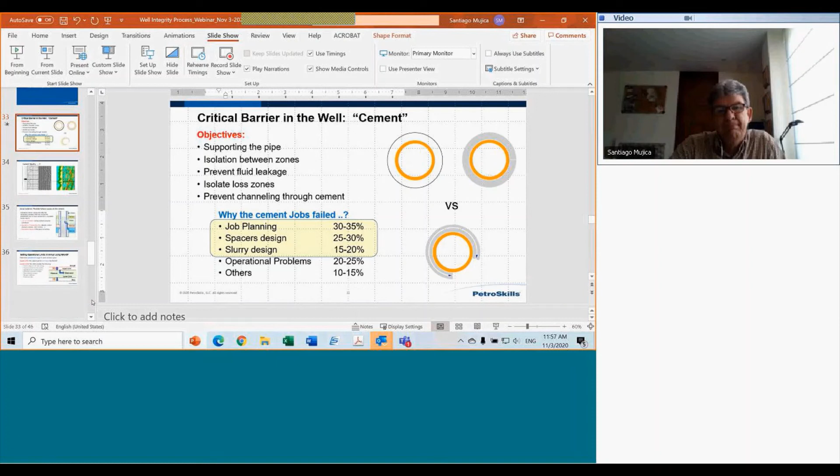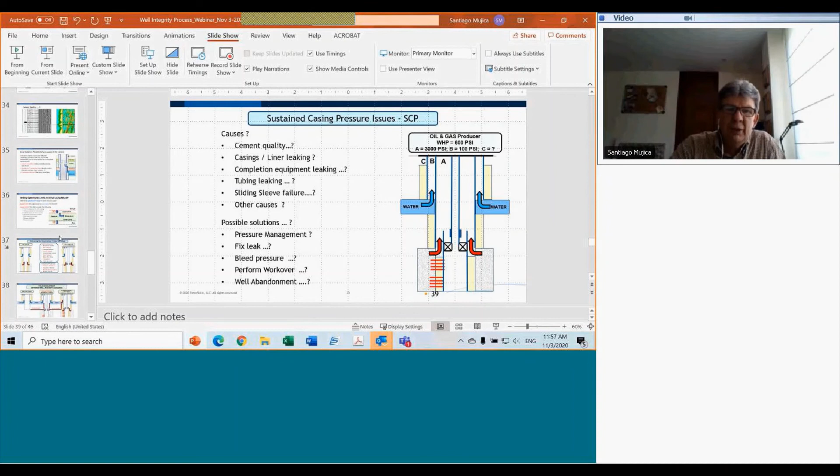Okay. The next question: is it acceptable to use a storm choke to insert and lock open a failed SSV? Can it be considered a barrier? Storm chokes, I mean, we use storm chokes in many wells within Colombia, okay? But we use those because we didn't have that option at the moment, and the well intervention was really expensive. We designed the storm choke. The storm choke should be capable. It's safety critical equipment.

But in other words, when you run a storm choke, you cannot consider that storm choke as a barrier, okay? Because you don't know how long it's going to be good for that specific storm choke. A storm choke is a very tiny piece compared with a safety valve. So my recommendation, a storm choke is not a full primary barrier. What is the other thing that you are troubleshooting? And the insert valve? An insert valve, it could be okay.

An insert valve is different than a storm choke, because with an insert valve you troubleshoot the tubing retrievable safety valve. You put a permanent lockout system, so you have these areas. Then this lower and upper area is going to be like a wireline safety valve, okay? Because you are going to permanently lock it open and communicate with a control line. So you will not have a tubing retrievable forever. Now you have a wireline retrievable, and that's a very reliable valve because it's the same wireline safety valve, okay? But the storm choke, I will not consider it a primary barrier, never.

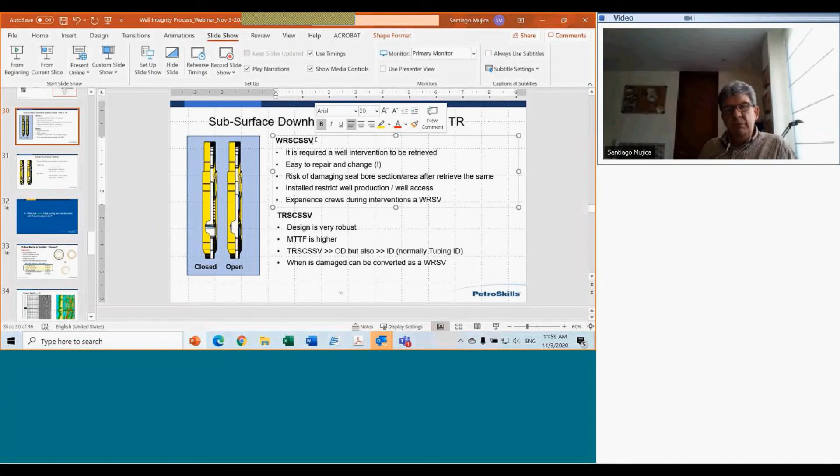My recommendation. Okay, so the next question is, some operators are concerned with regular bleed down of annulus pressures because of the possibility to make leak rates worse. Do you have any thoughts on this topic? Good question. Yes, it is. The continuous bleed off of pressure is very risky, because every time you bleed off some gas, you'll have some fluid going into the annulus, okay? So that operation is very, very risky.

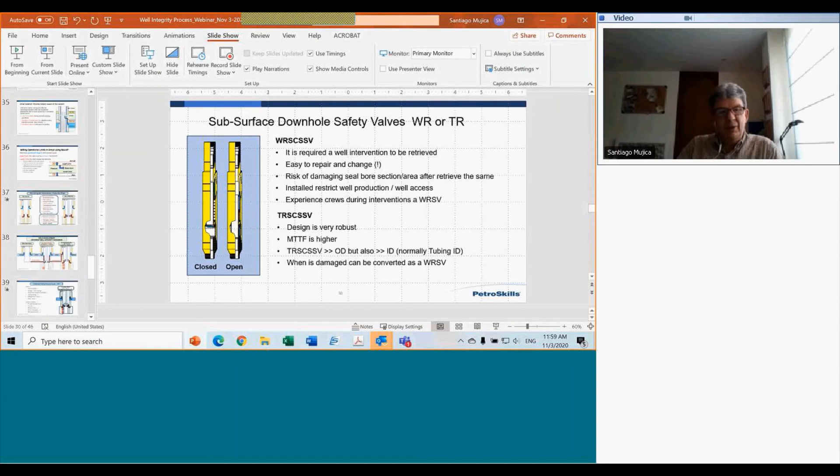I mentioned that in some instances, under certain management of change documents and a very specific risk assessment, you can do that, but it's not a good practice. I would prefer to go and fix that annulus pressure instead of doing that kind of risky operation, because, you know, different people are going to take decisions on the pressures, okay? So be careful with that. Yeah, very good question, my friend.

Okay. Next question. Most well integrity issues arise out of poor cement jobs, bad cement. How can we ensure proper cement in bad hole conditions? Bad hole conditions, that's a problem. Let's say when you have an unstable well, it's very difficult. If this is a well where you cannot pump cement, one of the things that you can do is try to do your best according to the unstable formation, trying to manage. You cannot pump it if you don't have control of the borehole, all right? Once you have good control of the stability, then you can pump the cement.

But if you have that as a critical issue all the time, maybe one thing you can do is try to do a second stage cement job sometimes. But I always recommend to the driller to do a proper cement job from the beginning, you know? So you need to control the well or the well conditions before you pump cement. That's it. You cannot pump cement without good pumping rates and stable pumping rates. Okay, it shouldn't.

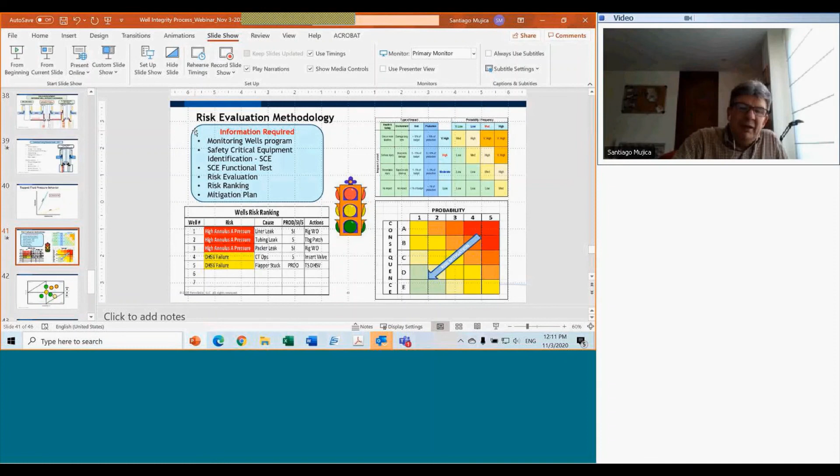So you should have a bleed off pressure mechanism at surface. Let's say you have 800 psi in the annulus setup, so if you have 800 or 900 psi, then you stop the injection. That's normally how you manage the gas lift system. Okay. So always you need a pressure relief valve at the surface, automatic injection pressure. Okay.

Okay. They said thank you very much. Okay. That's all the questions I have at this moment, unless somebody wants to chime in. I really appreciate when you have many questions. I really like it, and I will be very open to answer. And we are very open to expand more into details on the cementing and completion design issues and production side, annulus management. We can go for that in the future. I really appreciate your questions, all you guys.